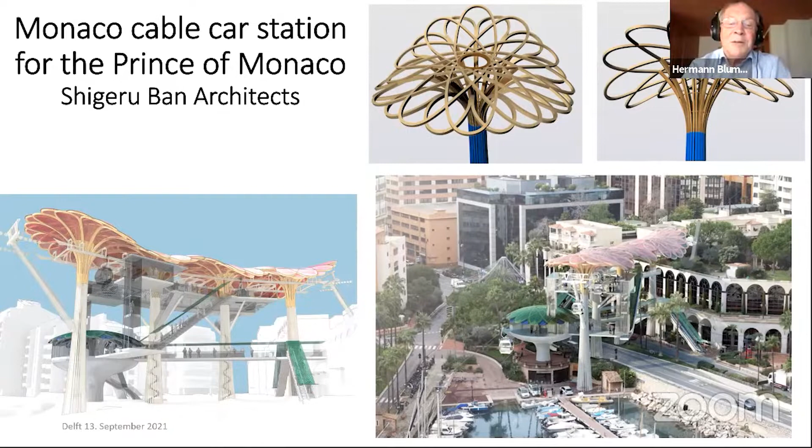In Monaco, we had a cable car station, a project from Shigeru Ban. The color pink is the color of the Monaco house, and below you see the racetrack of the Formula 1 cars. I was a little bit afraid that if the Formula 1 pilots cross this cable car station, then they look up to the top and don't crash in the curve coming behind. But this cable car station was not yet built.

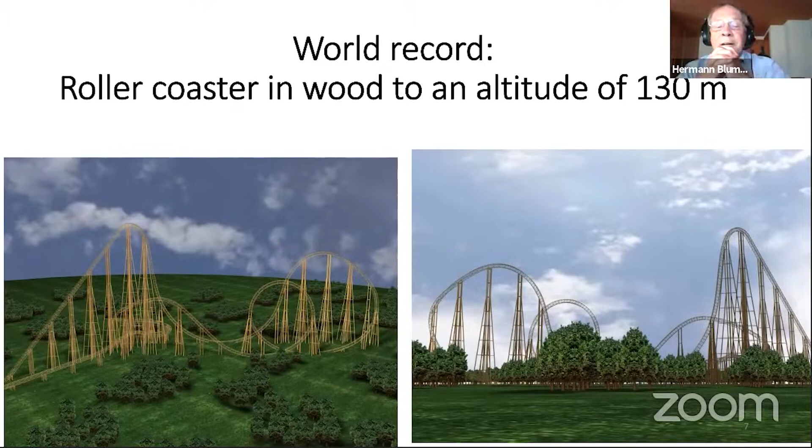One project I did around 2005 is a roller coaster in wood reaching an altitude of 130 meters. That was a world record at this time. I don't know if now we have roller coasters which are higher, but this project was very special — possible to do, but not yet built.

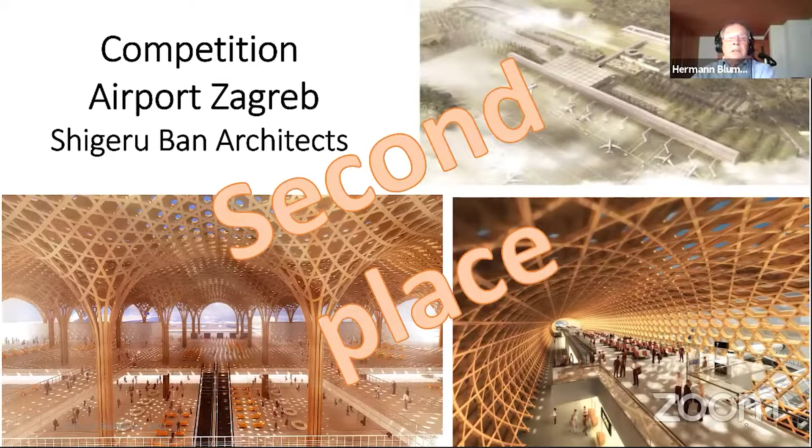The National Pavilion for the World Expo in Yeosu, South Korea, was designed with Shigeru Ban architects. It was also a competition, but without any chance.

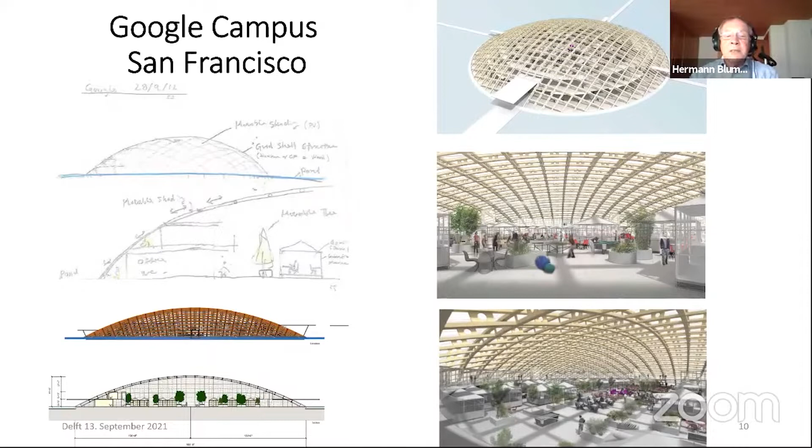For Google, I also had a project in San Francisco with a dome of 100 meters span, and 4 domes. We tried to plan it, but after the planning the project didn't go further, so we stopped these studies. But for the preparation of this project, I developed a new connection system with only wood dowels, plywood, and beams curved on the side. It's a very simple way to build domes — I think until 200 meters, or even 300 meters, is possible when we have a good connection system. My dream is to build something like that once in my life.

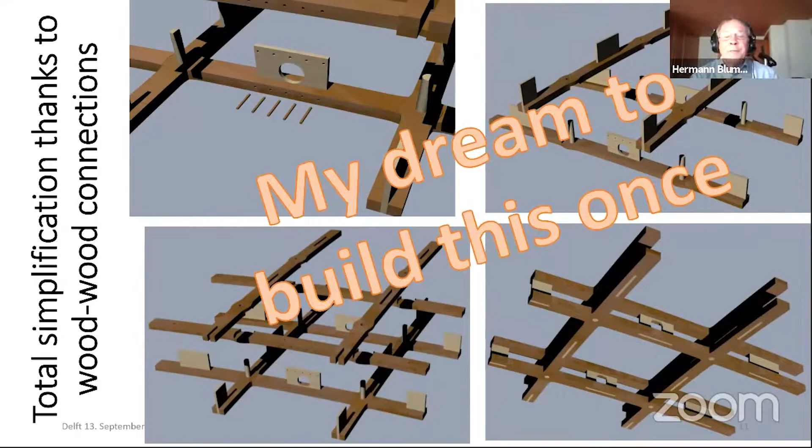Another competition in France, for the Le Monde headquarters, together with Shigeru Ban, was very audacious, a really bold timber construction. It was not easy to develop because the forces were very high, but also in this competition we had only the second place.

Now I come to a project which started in 2005 and ended in 2010. I think the role of the architect is mostly as the inventor, not the engineer, but he works together with the engineers, and the engineers have to be good servants. Normally the engineers are a little bit anxious when the architect has a project — they go a little too far in the design, and they bring the architect back to a more simple construction. But I think engineers now have, in the future, the goal to work really well together with architects and take over their ideas and so forth.

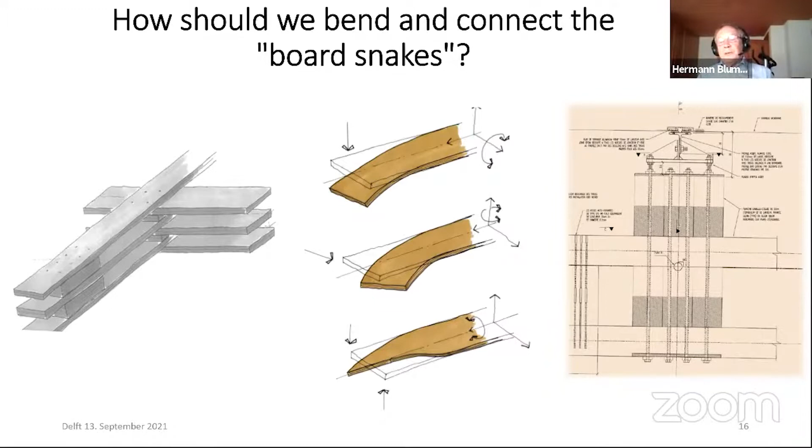The problem in this project were the double curved, not board beams, really beams, because the span was about 100 meters from one corner to the other corner. Between there were some supports, and to connect them, also the drilling of these beams was at this time not solved. The proposal from Arup was to connect these beams with long screws about 1 meter 20 centimeters length. The problem is to integrate these screws in this packet of beams, because you're never very precise finding the holes.

So I had really a black hole in my head, but I had proposed the feasibility of the construction. Doubts about whether the visions set by the architect could not be outside the realm of possibility occupied me for more than 7 months, and it was really, really a hard time.

Then I had the first idea to build it with a BSB system. I know it very well because I do lots with this system, to weave the beams in this way. I met Shigeru Ban in Zurich 6 months later, but his remark was, you can perhaps not read that, as in Japanese that has no... I don't want a construction like that.

Then I had to go on, and I had ants in my head, and the solution should be like that, with crossing curved and twisted beams connected at the cross points. But how do you do the assembly on site, how can you form these beams, how can you do the static calculation, how do you find the geometry of that.

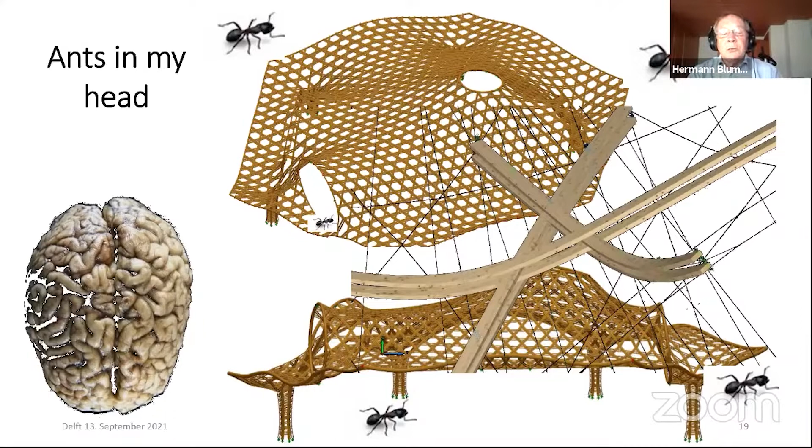So I learned Rhino, and that helped me design the geometry. And the geometry more and more was developed in my head. But then I had a special idea.

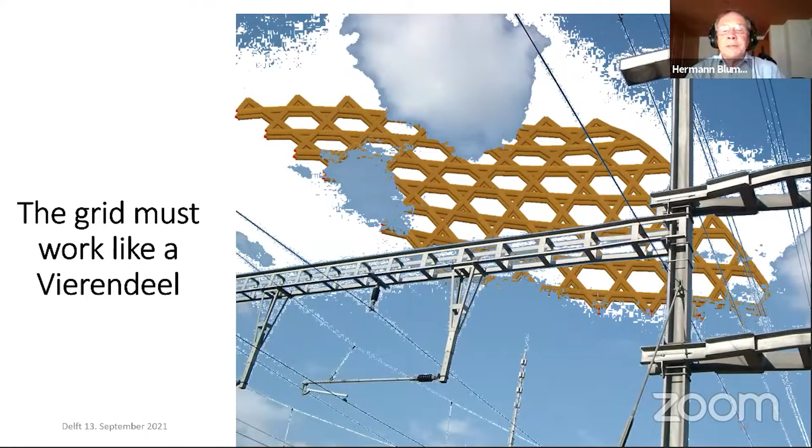I looked up in a railway station and saw that there is a rail system. And one morning at 5 o'clock, when I was at the rail station, I realized that could be the solution for the connections, and not these screws we saw in the slide before.

And that is so simple now. It's a knot with a thick dowel here in deonite at the beginning. That's compressed beech, very hard wood and very strong wood, with the conus to find the good point for the next layer.

And it's now clear how we can erect this construction layer by layer. And when I showed this picture to the company Ammann, the people there said that is all very simple.

Then we built a mock-up for the tender phase. It was not financed by the client. It was a risk, a big risk, a mock-up in this area.

And with this mock-up, we had the duty to bring these beams onto the machines. Here it is the Lignomatic. It was developed in 1991. And we had experiments with these machines, but we didn't have the programs for this project. So we had to write the programs, and we put together the mock-up.

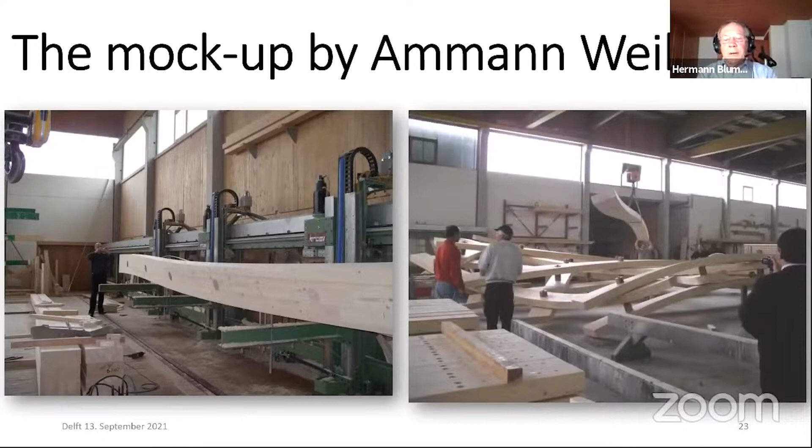With this mock-up, visitors came to Germany from France. The client came to Germany, and they were really surprised that we had found the solution to build a system like that.

For me, it was a big help that I now also had the people at the company Ammann. They could program the computer, the machine, and help to order the material.

But now you don't have norms for connections like that, and you are urged to do tests. This mock-up I showed before was used for the test. Before that, we tested simple connections everywhere. And when we tested the big model, then we had an accuracy of 0.5 to 2%, 2-3%.

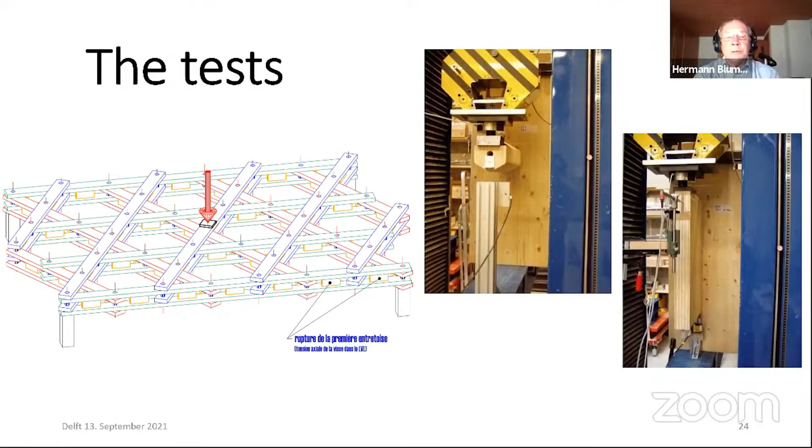So we were really with the slipping deformations at the good point. That helped us now to develop a real static controlling, and we needed from the geometry office of Fabian Scheurer, Design to Production, to design precisely the construction, to find out the raw pieces for the curved beams, curved and twisted beams, and also to transform this geometry to the machine. That was a big work.

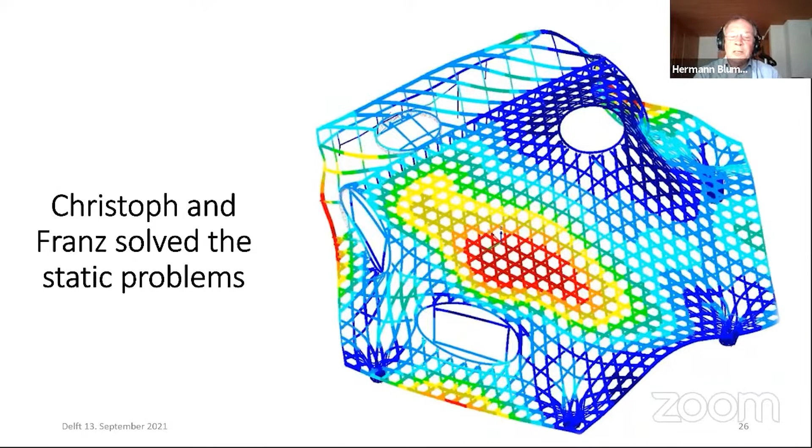It was at the beginning not easy to understand all these problems we had, and also the static calculation gave us a little bit of a problem at the beginning. But with this calculation, you can find out the deformations and strains you have in the pieces, and so you can develop a very good construction with a very good fitting to the reality.

And then we started with cutting the pieces. These pieces must be sometimes glued with one curve, sometimes glued with two curves, and also sometimes glued with two curves and twist. And then we cut the rest, and the accuracy of these beams was about 1 millimeter. That you can only do in timber construction. In steel construction, it's, from my point of view, rather not possible.

And Franz Tschümperlin, who was the engineer of this project, is now on site and explains that this beam must fit at the right place. It must have a number and must really be put there where this number was given by the project.

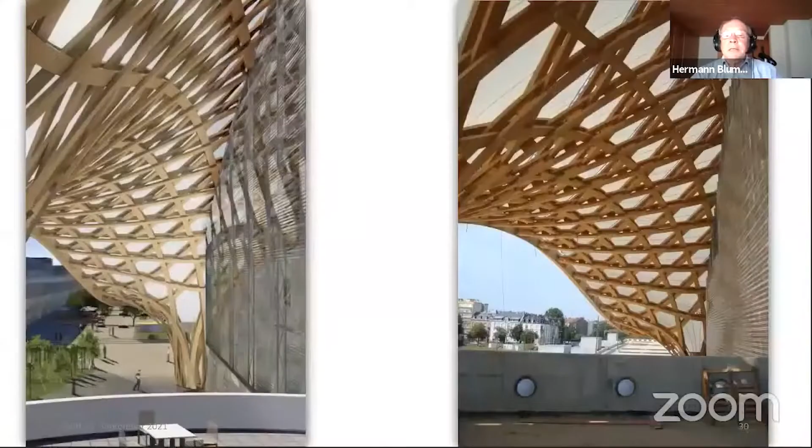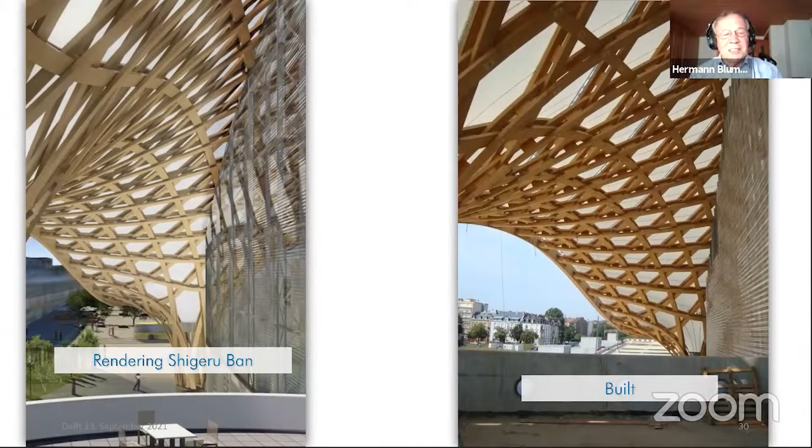The roof building with the membrane, and now you see one very interesting thing. We had the rendering from Shigeru Ban, and that was built. And sometimes you think that the rendering is always built. But I think when architects have a rendering, we should try to build that in reality as the rendering is shown. Here the same, the rendering of Shigeru Ban, and that was built.

We know that in a good team you can do impossible things. In this team you need a specialist in every discipline. The architect at left is Jean de Gastines, the co-architect to Shigeru Ban from Paris. We need also Fabian Scheurer. He was the specialist for the geometry and for the transformation of the geometry to the fabrication.

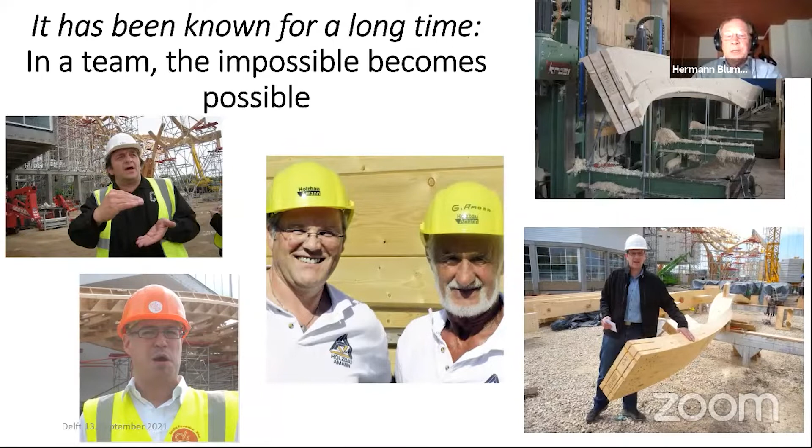We need the engineers, Franz Tschümperlin, a young engineer, but a really, really good and analytic special engineer. We need also the company Ammann with the chief Gerhard Ammann and his servant Bernhard Tritschler. And the one who wrote the program for the matrix was Martin Pfund. He's not shown here in the picture. So we can learn that when we have a complicated project, we first should form a team.

Now I come to my first project, 2010 to 2013. Draw it, we build it. With Helen and Hard. They have an architecture office in Stavanger and also in Oslo. They asked me once, in 2010, to come to Stavanger and to give them help in timber building. And so they started with special drawings with timber. Stavanger is in Norway at the southwest coast, and there's a lot of wind, but it's not so cold there.

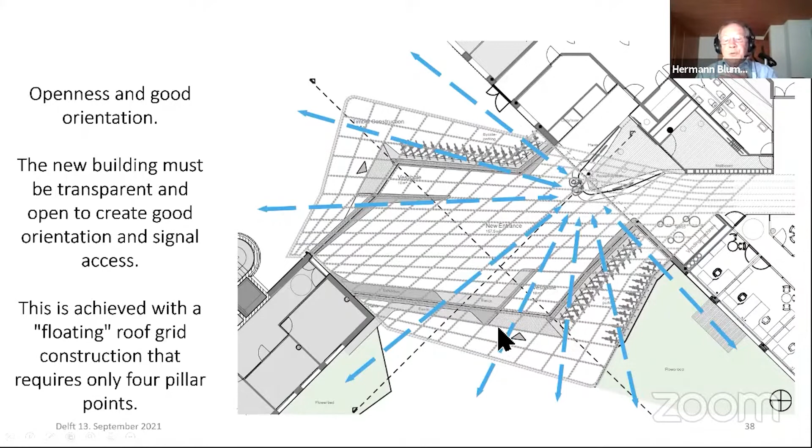Here there had to be an openness, and the new building should be transparent, really for the visitors to find the entrance. The idea was to have a membrane roof, and then the big problem in these buildings, when you have two buildings and you connect them, is the fire resistance or fire protection in this area. So we had to plan a firewall at the existing building, hardly discussed with the authorities in Stavanger.

Stavanger is one of the biggest wooden towns in the world, and every 2-3 nights you hear the firemen go out to extinguish fires in this town. So they are very anxious about fire protection.

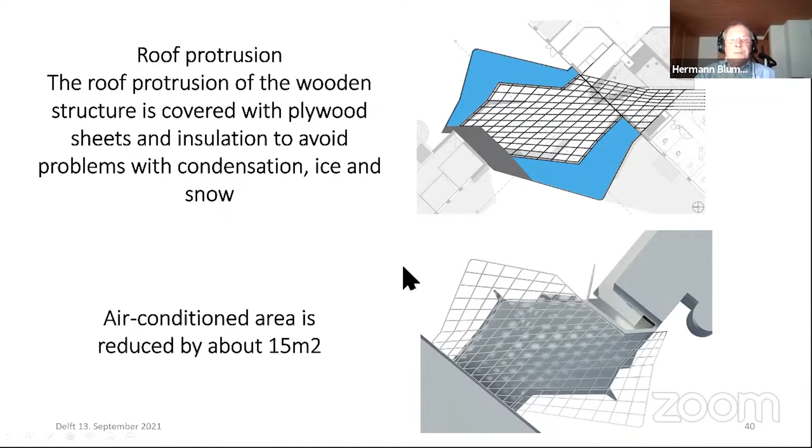At the beginning, they tried to have a roof with a whole membrane, and then they had to reduce the membrane of the inside, and the canopy was covered with plywood. The design for me, it was very nice. I was eager to start my work. Also, the canopy was really spectacular.

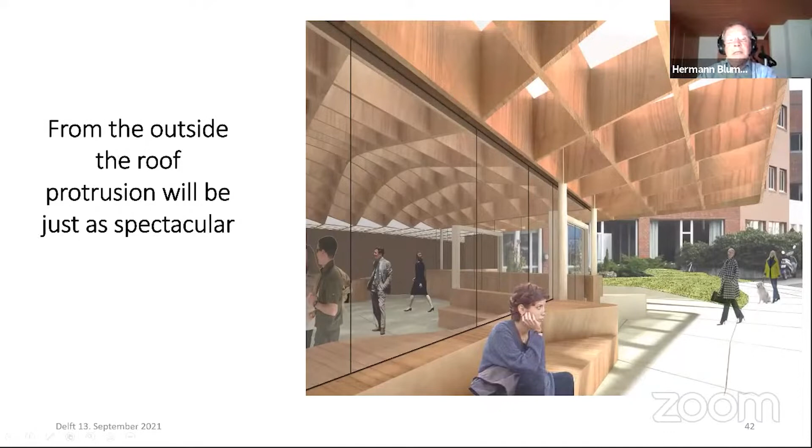My service I see as an engineer. So I start with this rendering from the architect, what I have to do to transform these renderings in a rendering of engineers, so that you see the connections, the dimensions, the right dimensions, and you can form a picture for your head, how it would be in the geometry dimensions and how it could be with the supports and so forth.

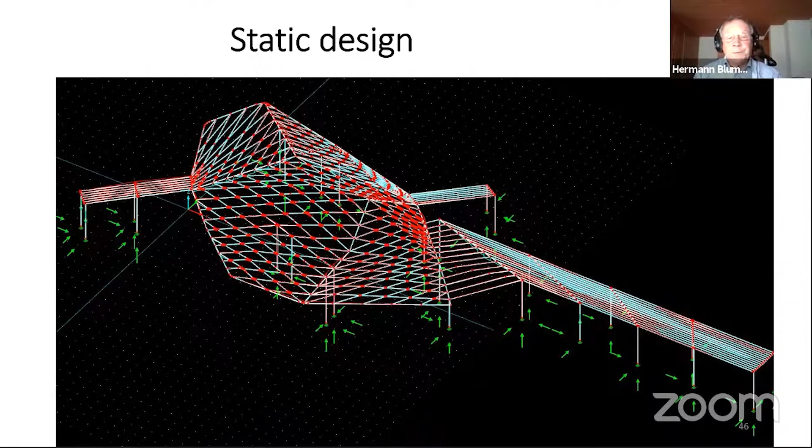Then the next step is to do really rough static analysis, not very precisely. It's not necessary at this point, just to find out if you are on the good way with your dimensions. And the next you must find out is the connection systems. That is very important. The connection system relies also to the erection on site, also the assembly on site or in the factory. And in the connection system, you have the forces to overtake from one piece to the other piece, and it should be easy to assemble.

And that is sometimes not so clear when you work with timber, because we have a lot of possibility to connect with screws, with nails, with glued and so on. And there it's good when you have a good experience. Normally it also has the advantage when you are carpenter, when you had learned at the beginning as a carpenter, before you study at the high school. In Switzerland, most engineers had to start as carpenters, and then they finished as timber engineers. Every year we had about 50 young people who learned engineering on this track.

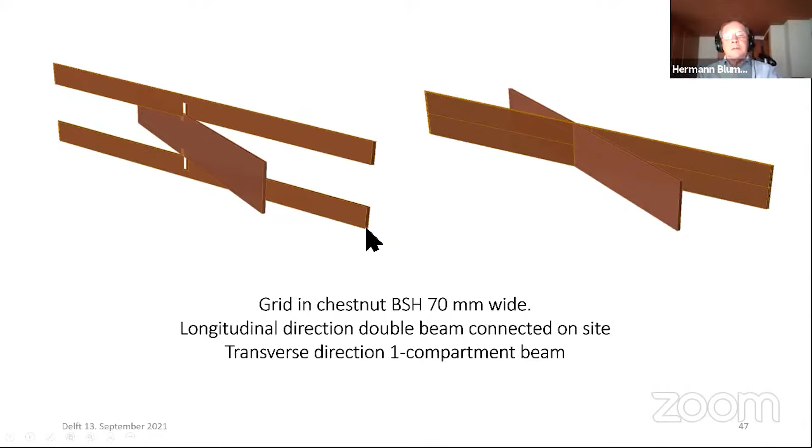At this time, the client is interested to hear something about the costs. And so I had to find out the amount of timber we used for these constructions, and perhaps also for the covering of the roof when the architects don't have a possibility to work together at this time with a roof specialist. And so I give prices for the translucent roofing, for the timber, and also for the vertical glass walls and glass doors.

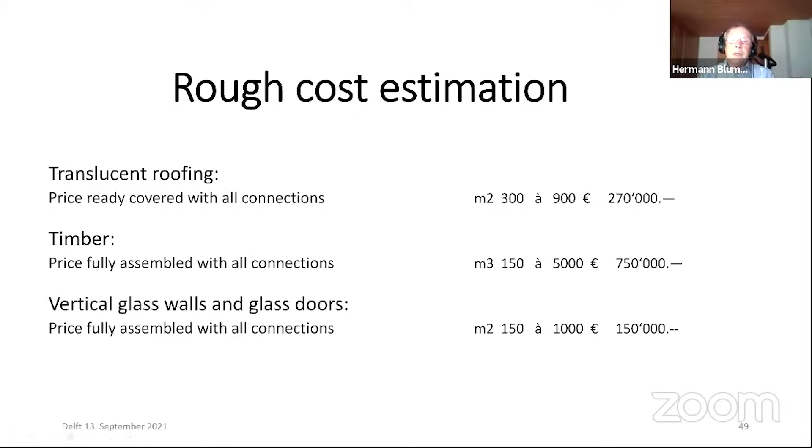But then, yes, we showed that to the client. Nei, that's in Norwegian, that is the same as no in English, or nein in German. Nei, it's too expensive. It's not what we want. All for the bird. The architects were depressed and I had to help them. And we started with an alternative project concept.

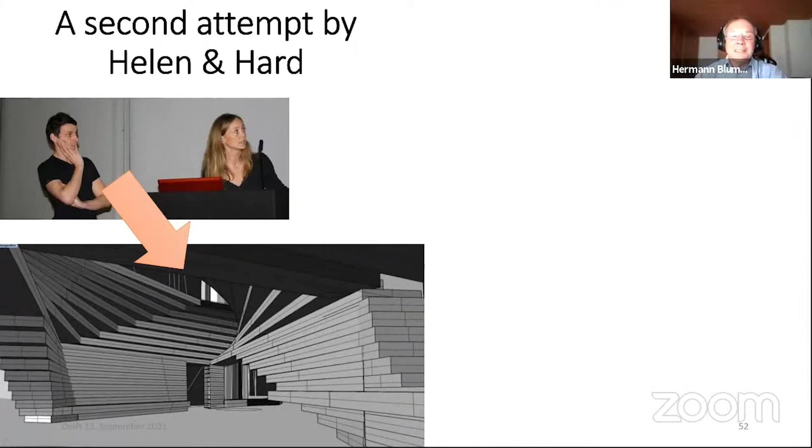And then I met them in South Africa in 2012 at the wood conference, and they showed me this new picture of the new project. And then for me, impossible to build it, the rendering. At this time, you shouldn't say anything. You should sleep one night or one week and then give an answer.

They had started with a new project, and the area was a little bit smaller now, and it's a reduced version with the hope of smaller costs. And the construction is very simple, when you see it here, you have to stack boxes one on the other, and these boxes are turned in different directions.

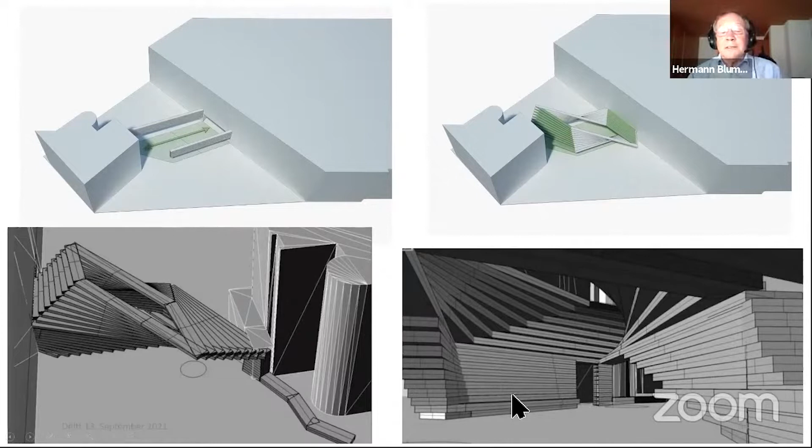But you see, the problem in timber is to not have deformations in the vertical, because we have 4 meters of height with these constructions, and we have windows here and port doors, and the construction shouldn't move in the vertical. The big challenge is 24 boxes rotated on top of each other. And this first rendering was really fascinating, but now we have to find out a way to build that.

And the solution was, I went to Ammann in Weilheim, to Lignotrend, not Ammann. At this time it was a separate company. And we decided to work with 3-layer panels, spruce panels.

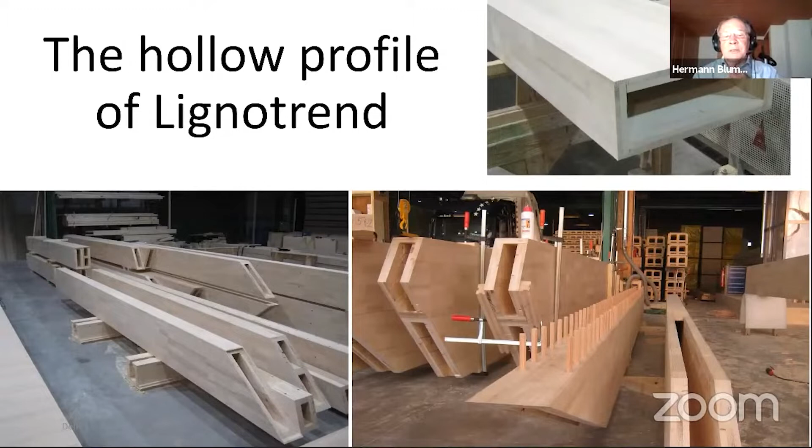And with the hollow profile, we had found the solution, because we had also a problem of temperature insulation. And now you have to do the static calculation and to connect all these boxes. And to connect them, we used screws that my son had calculated.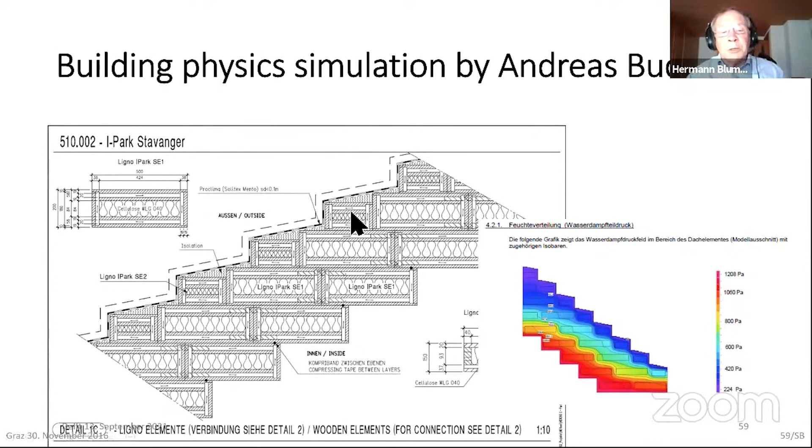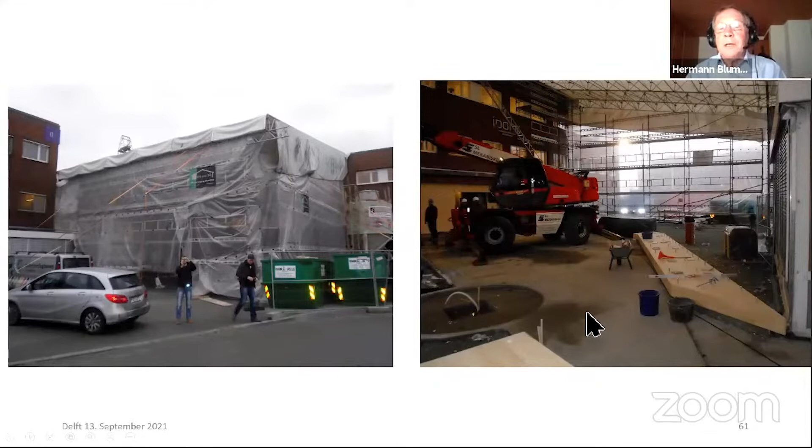Then we started with the fabrication of these boxes. You see these 3 layers with different thickness, and they get to the side. And to build up this construction, we built a shelter, because in Stavanger it's raining 200 days in the year. Really, it's raining almost all the time. 200 days, and so you must protect the timber against the humidity from the weather. But this shelter was really helpful, because we worked not as a carpenter, rather as a furnisher.

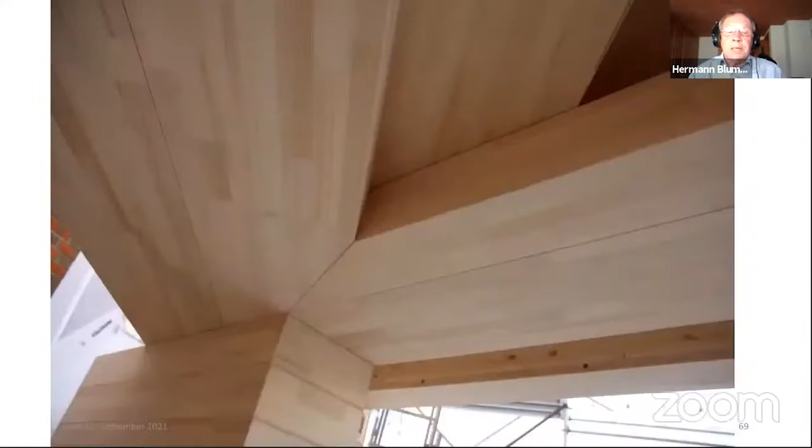The people were coming from Germany because we didn't have the people in Norway to build up a system like that. You need very good carpenters to do that. They did it from the company Trend. And in 1 week, they finished, and you see the accuracy of these constructions. Fantastic. This very high amount of screws. Just some pictures of these constructions.

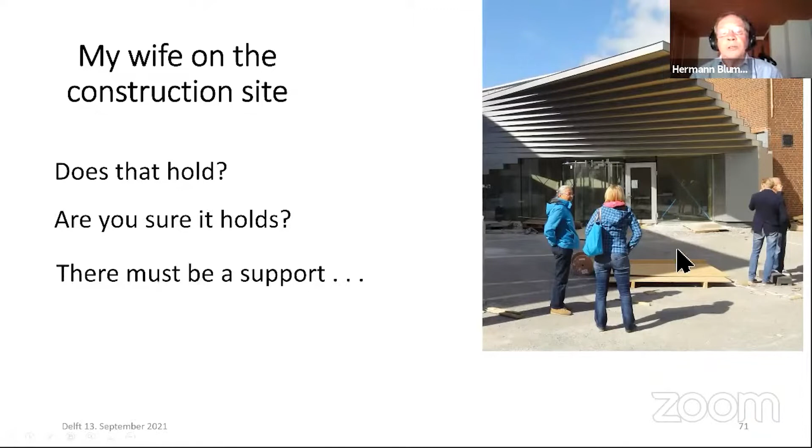And the carpenters were very happy to do this work. But once my wife was on site, the construction was not finished. Does it hold, was her question. Are you sure that it holds? Next question. And then there must be a support. I got a little bit angry because I would say that I'm an engineer, it works without support. And at the end, I had the help. I said to her, my son had done the static calculation, and then all was okay.

The view from inside, the view from outside, really quality work from German carpenters.

I come to the next project. It was from 2006 to 2016. You see, it was a very, very long time from the first idea to the finish. We started with the first project, then the money was not given, and then we had to restart, and yes, that's the problem with this project. And it is a project together with Shigeru Ban. He was born 1957 near Tokyo, in Japan, and as a young boy, he would learn carpentry, but then he had the possibility to start as an architect. And so he has a good reference to timber. And he has also a good understanding of static dimensions and timber systems to build. And sometimes he comes with ideas where I'm also not able to see the solution very quickly.

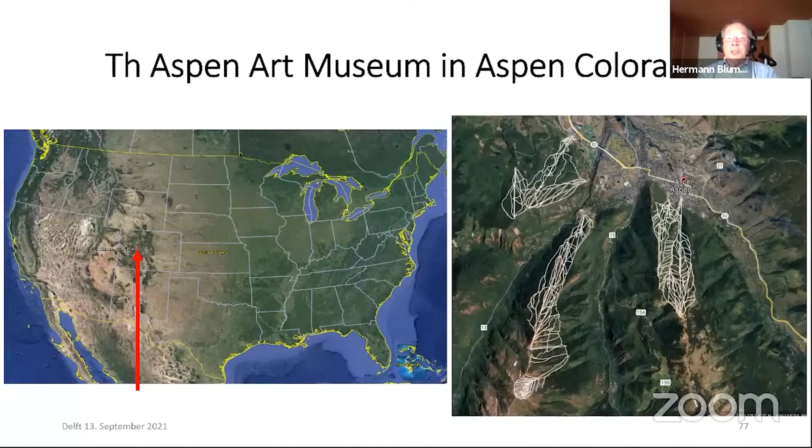We saw the facade with these woven wooden pieces, and what you see here is the truss beam with these waves. The building concept is the museum below, but also the access to this area, because the skiers come at this height to this building and can go directly into the restaurant here. No, here below the roof. Here is a restaurant, and here the skiers can cross this, come up to this level.

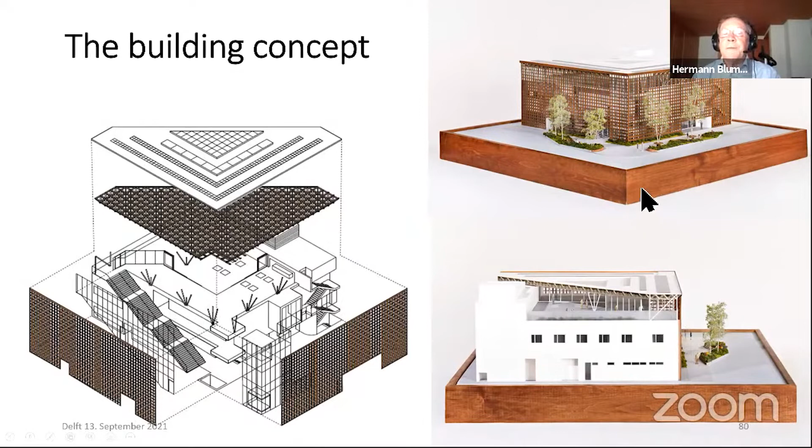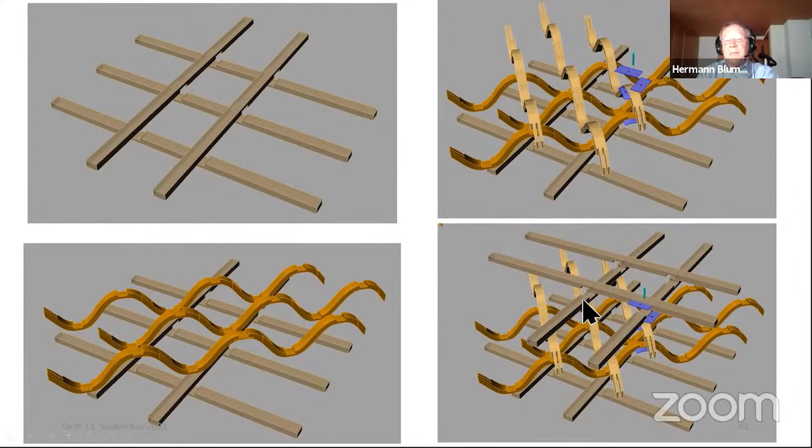And we had a lot of studies of possibilities to find out how we can build this roof with this really high snow load in this area. The first concept was reinforced lap splice with composite materials. So to have chords below crossed with a cutout, then these waves as truss diagonals, then the waves in another direction, then to connect them together with the help of steel.

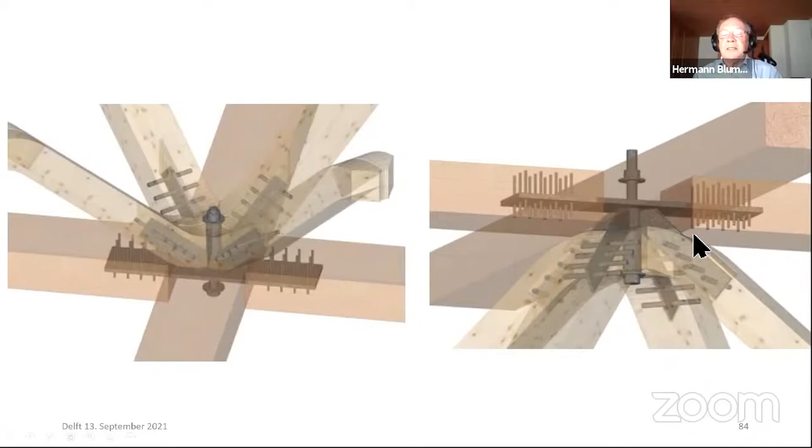But that was not really the concept we went on with. Then we had a concept from the engineer from Colorado, Greg Kingsley. And that is not my way to build, but in the United States they didn't have another idea than to use a lot of steel, and that is not the preference of Shigeru Ban. He doesn't like steel in these connections. And you see also the amount of drilling and cutting is really high, and the steel costs a lot.

Then we went to a third concept, and that was a very short idea I had once. It's a little bit special, because the big problem is not the chords, the connections we can solve, but these diagonals are a big problem, because there we have traction and compression forces, and in this area where we have to cross these big forces, we have cut out the timber and all these connection pieces, and also this bending here, and that is for the engineer absolutely catastrophic.

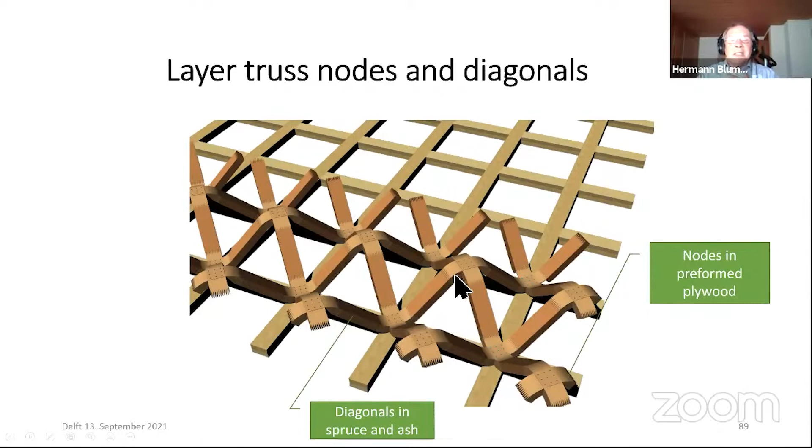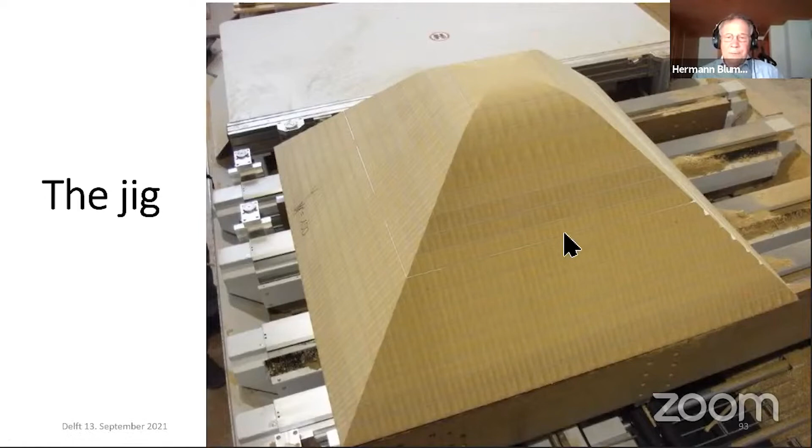And what I thought is to develop connections here with crossed veneers, and I made the connections between the diagonals in this area glued, and so these waves could be built. But then you must have a mock-up, or you must try to do it. And we could do it in Switzerland. We had a jig and put on these veneers here, and with a vacuum foil we take out the air, so that we get the compression, and then we could take out the pieces in these forms, and then we cut it with 5-axis CNC machines.

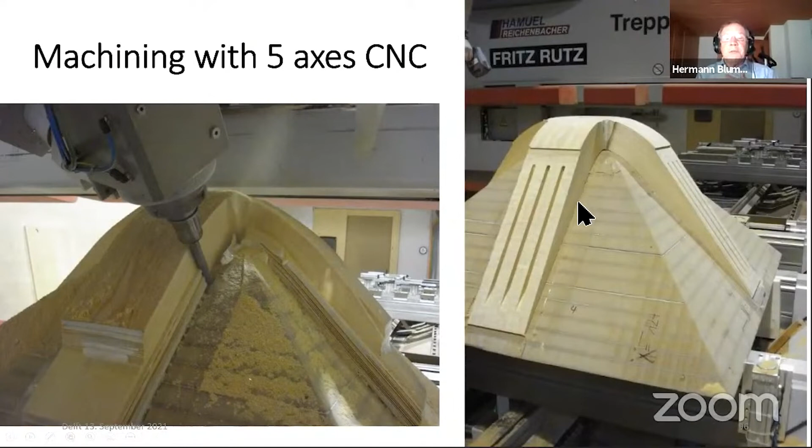That's not so complicated to do when you know how you can do it. But the problem was they don't have these machines in the United States. So it was not possible to work with these processes. I brought this piece to Paris, but we couldn't go on with this idea.

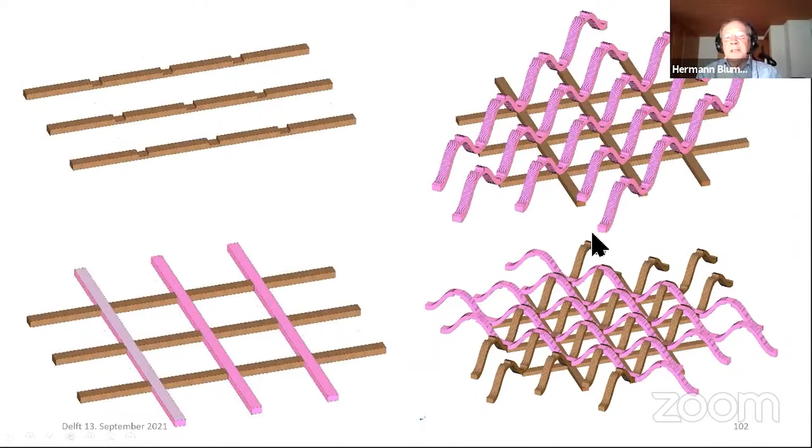Then we came to the next concept, and that was the final concept with glulam joists, birch plywood webs, half-lapped joints, full threaded screw connections. You see here the model in an overview of this roof. The supports were distributed at different places, and we had some big canopies. Just to show how this idea will work also with the short crossing, and now with the long wave, not with these short pieces, and they also cross them, and we put on the top joists.

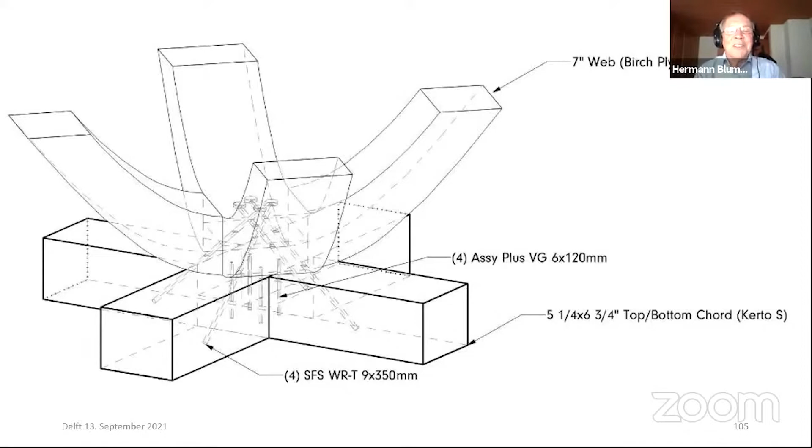And the waves were produced with birch plywood, Finnish plywood, because they don't have this plywood in the United States, and glued together. And it was very important to develop also the connections between the joists and these plywood waves. And the idea was to do it with screws. SFS from Switzerland helped us to calculate this screwing, because we didn't have norms for these connections directly in the United States. And the United States is a little bit specific with its norms.

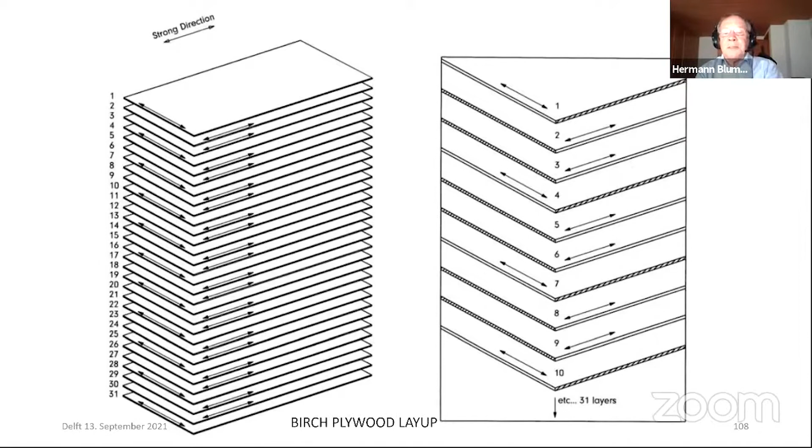But also we did tests here. There are some points where we need 4 screws, then more screws, 8 up to 16. So we could take these forces. And the next challenge was to glue the plywood with the right layers, because we have forces in this bending of the waves where we need plywood with the right amount of layers. That we had to calculate and do in the right way. And where we had big forces, we thickened the wave. And you see here, perhaps here is a column below, and then it was thicker and thinner, the connections between the waves.

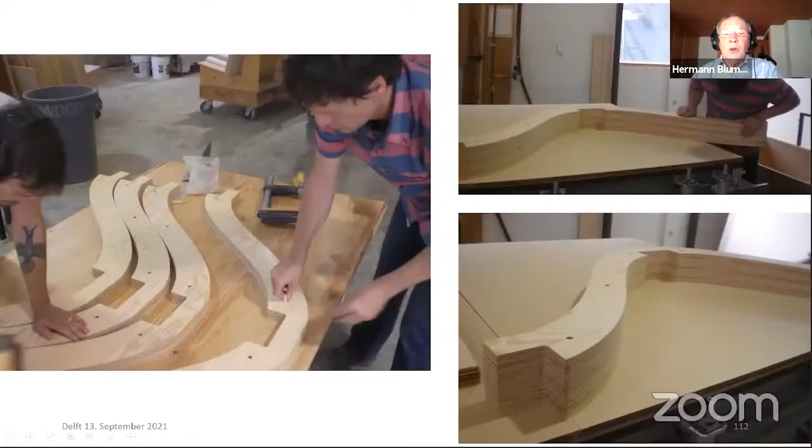You should build a mock-up, because you can learn with the mock-up, and the costs are not too high. And we had a Canadian company, Spearhead, who was able to cut these plywoods, to glue these plywoods, firstly to build this mock-up under very strict control from Greg Kingsley, the engineer in the United States. And you see here the cutout, and here the pieces finished as a mock-up.

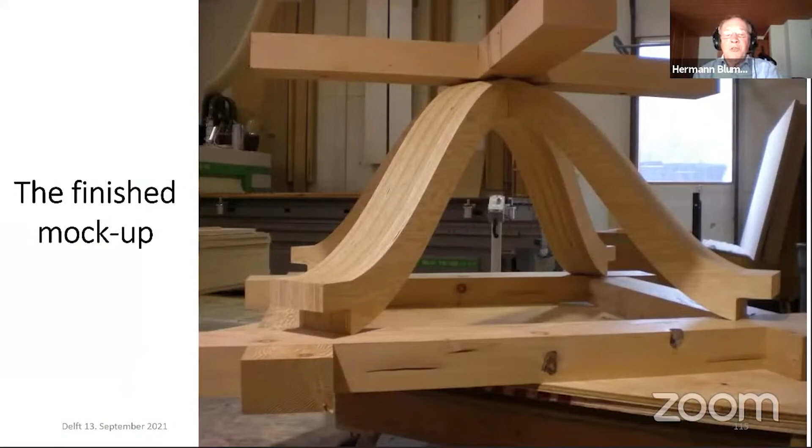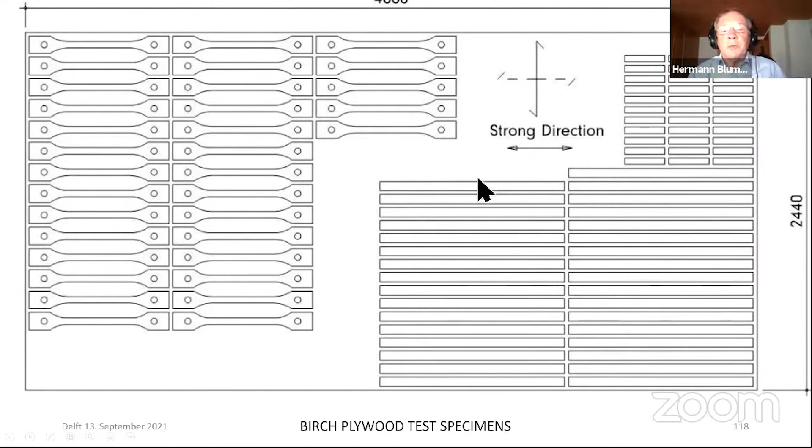So the client can see it is okay, also the visual view. And now we have to test. We had to test the plywood. We did it in Switzerland because in the United States they said we can't do it. We tested all this plywood on traction and compression and had also some new knowledge with this test to work with plywood where the directions of the forces are changing a lot.

The compression was a little bit a problem because these veneers were too thin and they broke at forces we didn't attain. And you see also the elongation of this test specimens. Then we come to the shop fabrication.

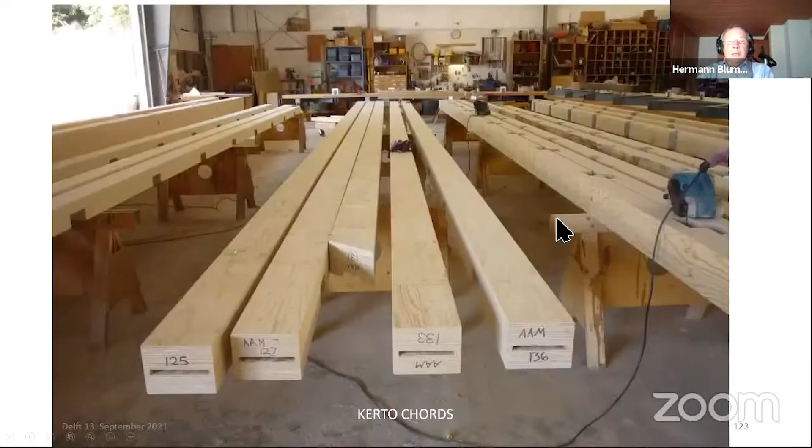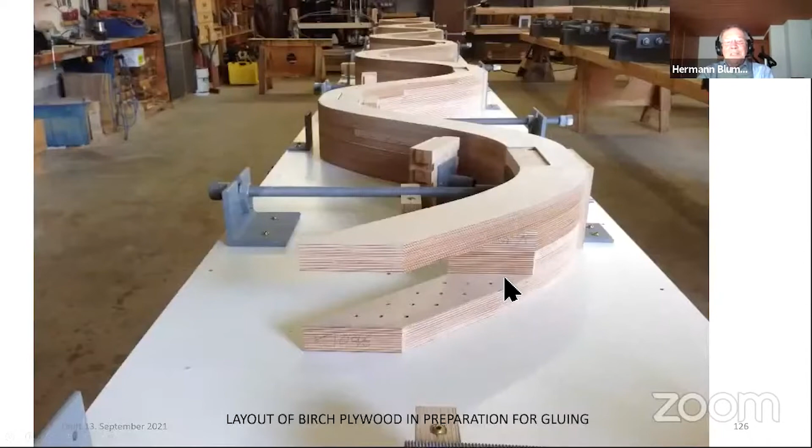The chord with Kerto, that was not a big problem to cut this chord. But these webs were very special. All these birch webs with this gluing with the right compression, and the web after gluing, the birch plywood web after the production, and the birch plywood webs ready to ship.

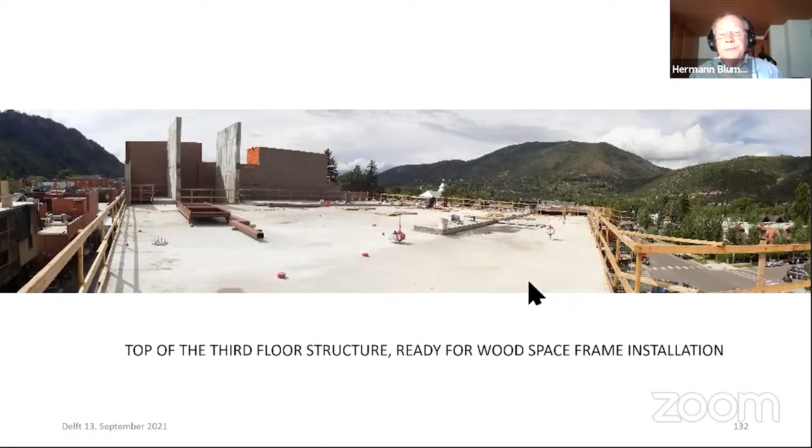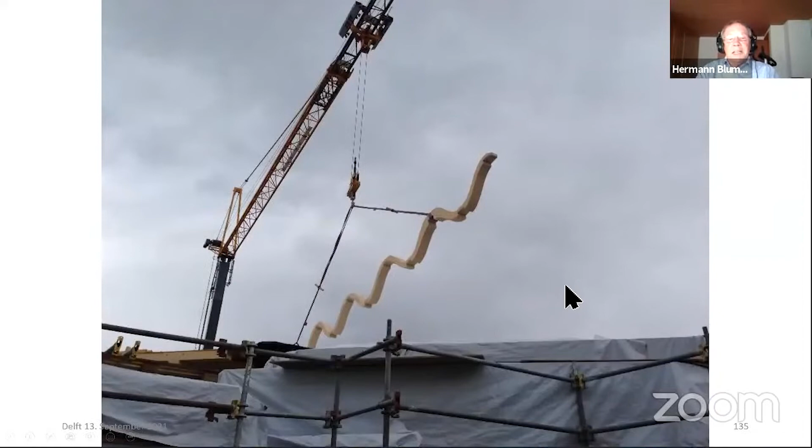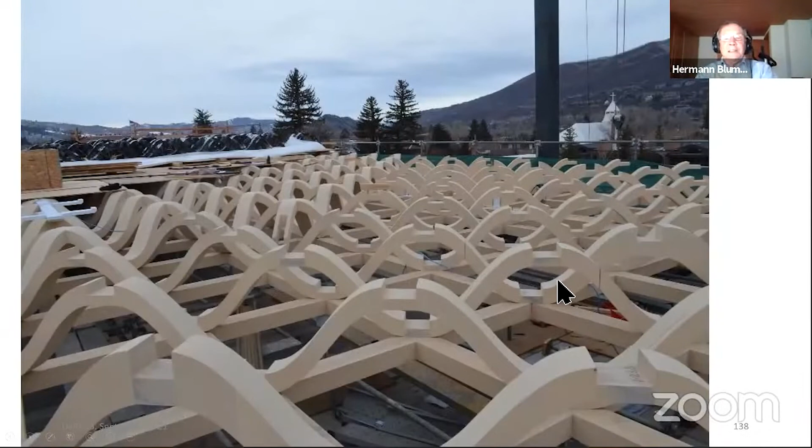Then the webs were brought by a crane and put at the right place, protected with a paper because the weather was not so good. And now all these webs, the diagonals, are in place. Then a connection with 8 screws. And you see it is winter, 20,000 screws and 7 degrees below zero, hard to work.

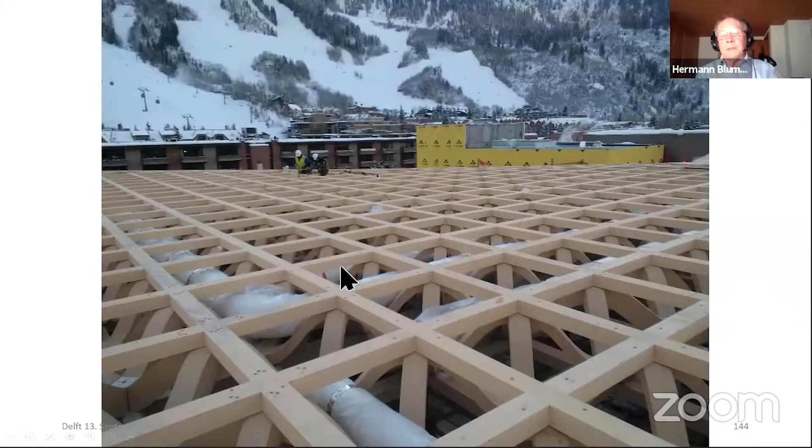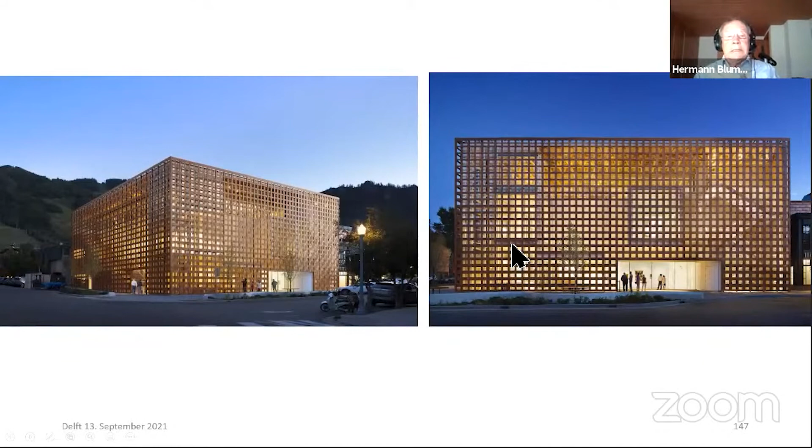But they finished, and we were astonished by the good work they did, this Canadian company, and everybody was satisfied. And here the finished work, completed project, now some pictures. The facade, the rendering is absolutely the same as what is built after that. That now is built. That is built. The museum, this exposition.

And we had also here a team with the KL&A engineers, Greg Kingsley, with the architect, the local architect also, engineering office in Switzerland, Création Holz in Switzerland, the engineering office in Denver, Colorado.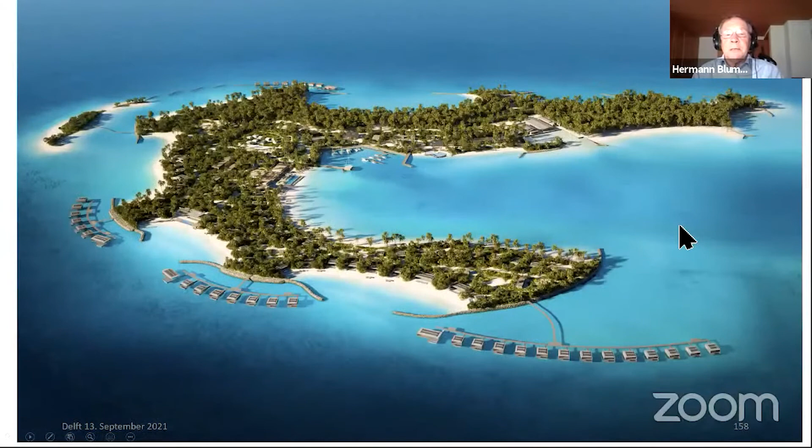Then I had questions from Markus Tilling, timber concept. "Salut Hermann, I hope you are doing well and you are dealing with many beautiful sides of life, including international timber construction. You probably know the artist James Turrell, who has become known for his space light constructions. We have now received a very recent request from the Maldives. A new James Turrell pavilion is to be built there. I immediately thought of you during the construction and the tricky questions that arise. If anyone can solve it, it's just you." That made me proud. "Are you interested in looking at this project? Greetings, Markus."

Yes, Turrell is an internationally known artist with very light, highly sophisticated light constructions, space construction rooms, and the pieces invite guests to contemplate their own perceptions of form, immersed in the abundance of light, color, openness, and Turrell's scape. Here some projects from him.

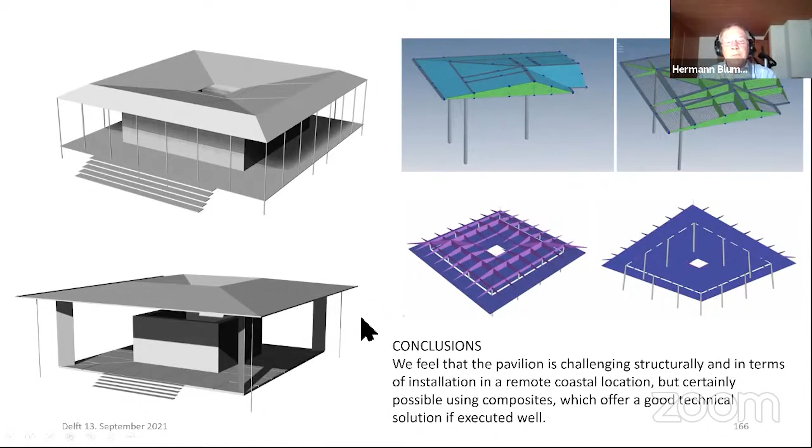And this construction was not really good, so they changed to a composite proposal, as we have perhaps in new cars or skis, etc. And this proposal had just the problem that the costs were complicated to calculate and also to find companies who can do that.

My first dimensioning I started was with Rhino sketches, and you see here the span of this roof and the supports here, but at the end they were not the same. And the height of the construction.

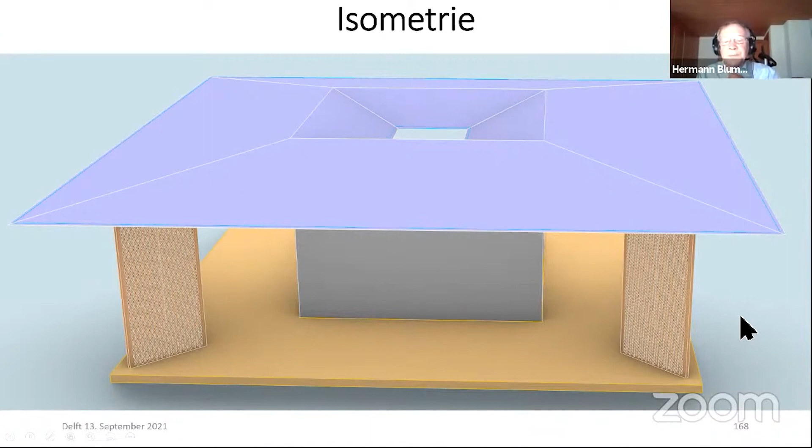I proposed sharing pieces here, or slides, at this point, because I had the pre-project from these Poland engineers. And so I thought I could perhaps build that with timber.

To start, it's clear we need a base plate where we can fix these wall panels, oak, and connect them with a tension rod. That's very simple to do. These panels, I thought I must have a look through. We know that from Ducta we can do it, and we build sometimes a wall like it, so you can see the outside from the inside.

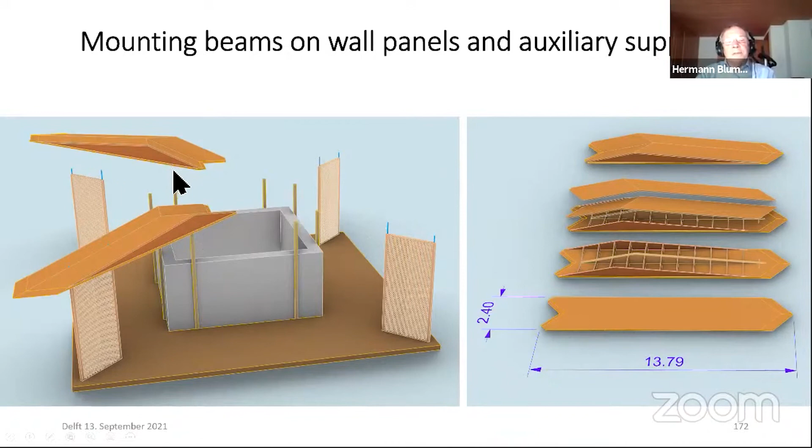From the erection, we need temporary posts and auxiliary supports, and here a main frame or main possibility to overtake the forces from here to a center. But you see, the problem is that at the end you don't have a support, and is it enough to connect them only in this area? But I found out that should be possible.

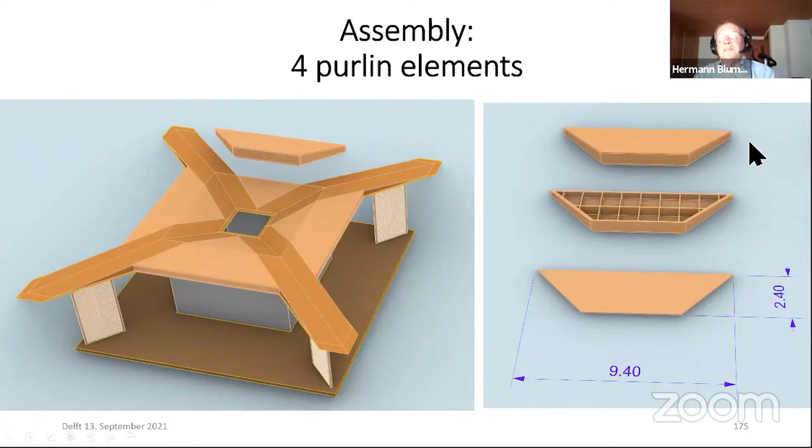Piece by piece it's adjusted to the construction, prefabricated, transported perhaps by a container, because to go to these islands you need a container, and you put that together. That was my proposal to Markus Tilling, but then we didn't hear anything, because nobody had the confidence that things like that we can build with timber, and that was really not given.

The textile cladding here for the soffit, and all this was unusable, only good for the birds.

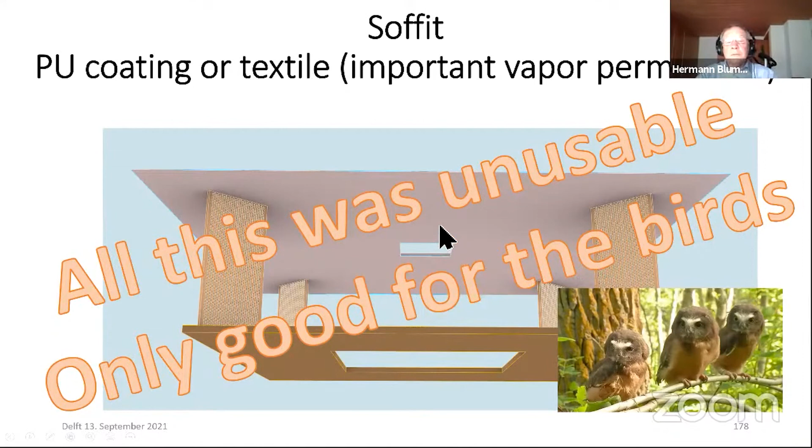We restarted with the definitive project. Now we had a new approach from James Turrell, and it looked like that. It's not new with a wall around, but now columns inside, this canopy steel, and with the board of the roof with 12 millimeters thickness maximum.

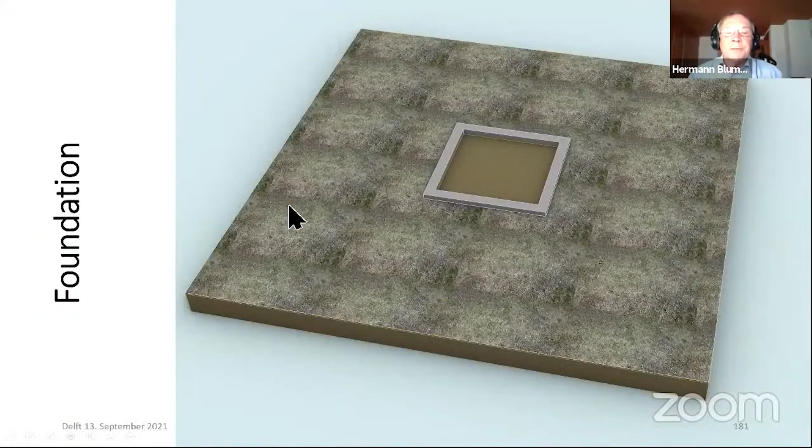I restarted with my studies. We need a foundation. The idea was to have a canopy with the concrete, and this concrete slab with 300 to 400 thickness, and then to have an edge beam to this concrete, connected with screws or dowels in the concrete, and then we could fix these columns stiff here, clamp it here.

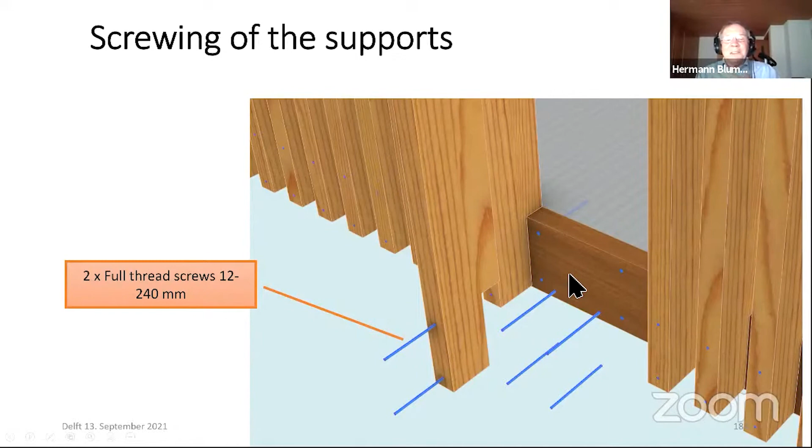It's necessary to screw this timber because we don't have any diagonals in this construction, and we don't have any slides to stiffen this construction. Also at the top, it has to be stiff with the purlins. To hold the distance, I proposed a steel rod to have every time a good distance between these beams. Now you see this wall is self-standing, clamped on the base, and can't move in any way.

And you go on with the roof construction, with the beams going to the center, with the core in the center. And you see now the problem: you must take the bending here. But my idea was also to overtake all the bending with the stiff connections here. And so we achieved to support this inner space, to hold this inner space in really, really good stiffness.

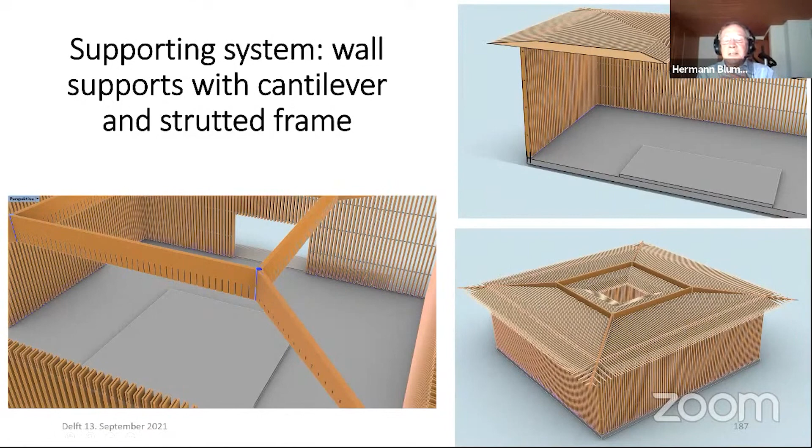We had a door, that's clear, then to have built this also. And then you see the purlins, the main beams, and the inner hole here. After that, a roof with a 3-layer plate was put on directly on these purlins, on this rafter. Here's the rafters and the purlins, and here's the rafter.

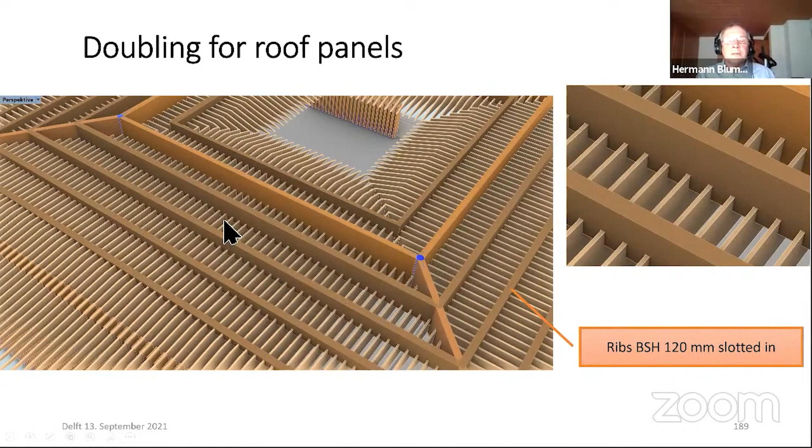And below, I proposed to put on a ready plate. It is not moving, because you shouldn't now see any joints.

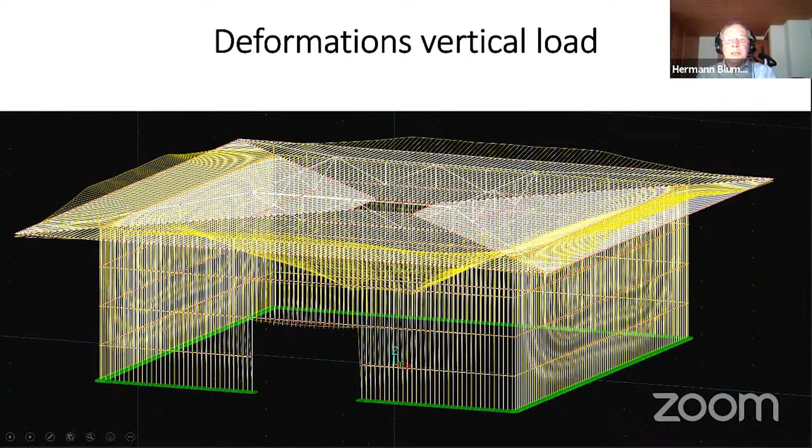The cut from this construction, and the deformation problem here: you see this area, the roof will sink down, and with this stiff construction, starting with the concrete slab, stiff connected here, stiff connected here, we can do it with timber. Everybody was really astonished that that was possible.

12 millimeters - now we have a little bit less, I think about 10 millimeters at the board, and this edge must be absolutely straight.

The assembly on site was not done by specialists from Europe. They worked from Singapore, but I can say they worked very good, very precise. We had a good experience, and that helped me to think that we can work in the whole world with timber when we have preparations, perhaps with architects and engineers, and sometimes with companies who have experience in cutting, and other companies who have experience in erecting constructions.

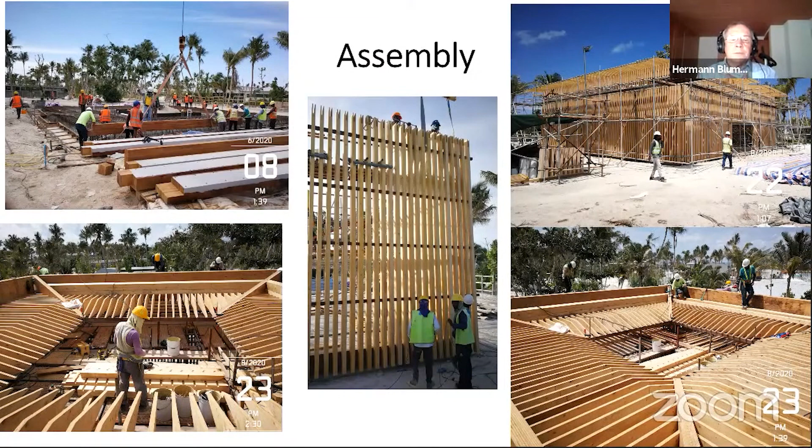The roof without the 3-layer plates on. And now I come to the end, and I will show now these special pictures.